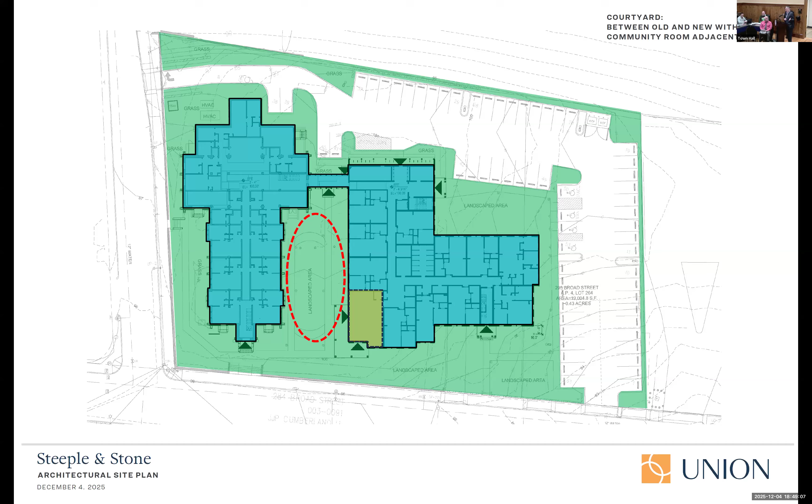And then the other thing was when we concentrated on the buildings, pushing those to the front, having a conversation with the church, we really tried to push the parking to the side and to the rear, so that, as Mr. Modica said, we don't have a lot of asphalt and paving visible to the passerby.

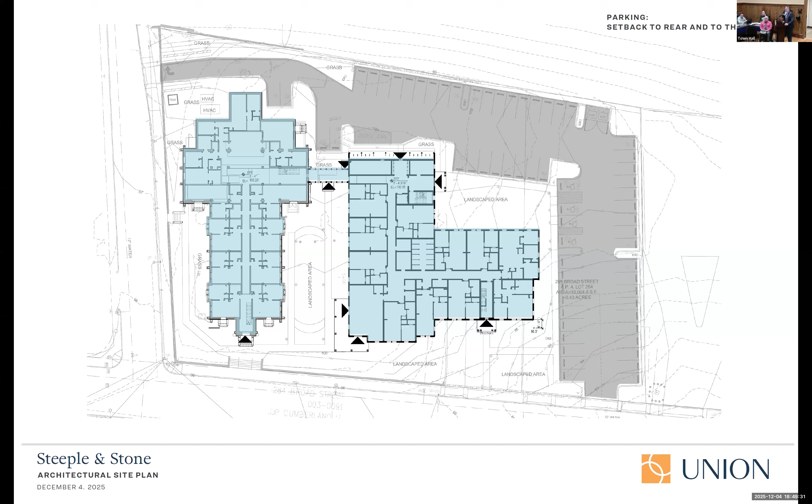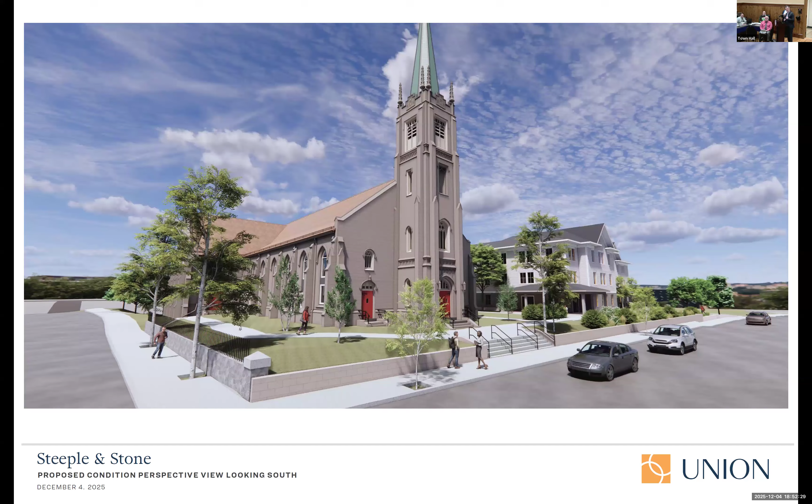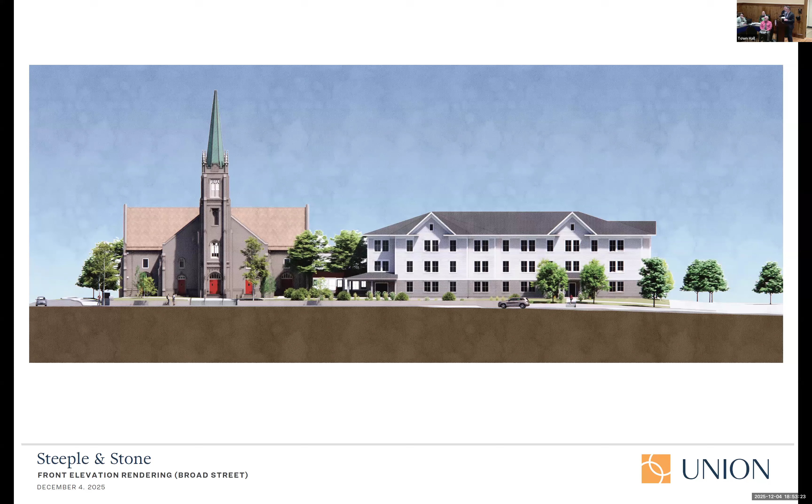I just had a quick question about the handicap parking - I was trying to figure out the placement, why the handicap parking isn't kind of around the corner closer to the main entrance. It looks like people would have to park and walk down that long sidewalk to get to the main entrance. Let me go back to that real quick.

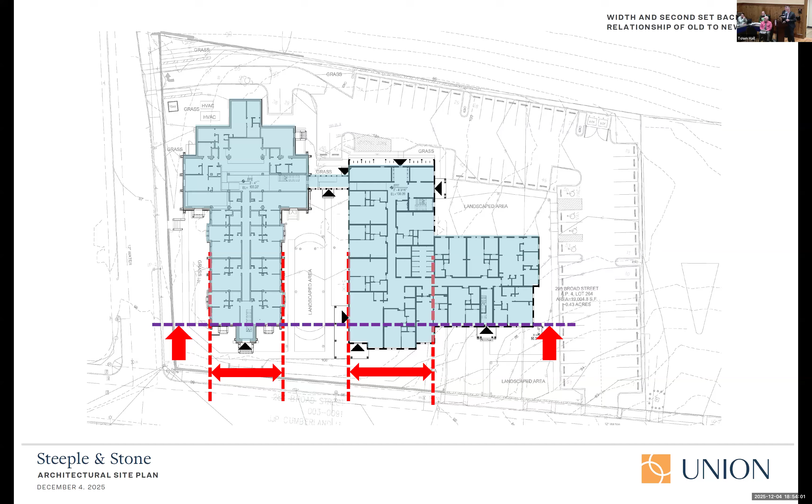Okay, I'll let the civil engineer take care of that one, is that okay? Okay, great. Anyone else? Mr. D'Ambrosio.

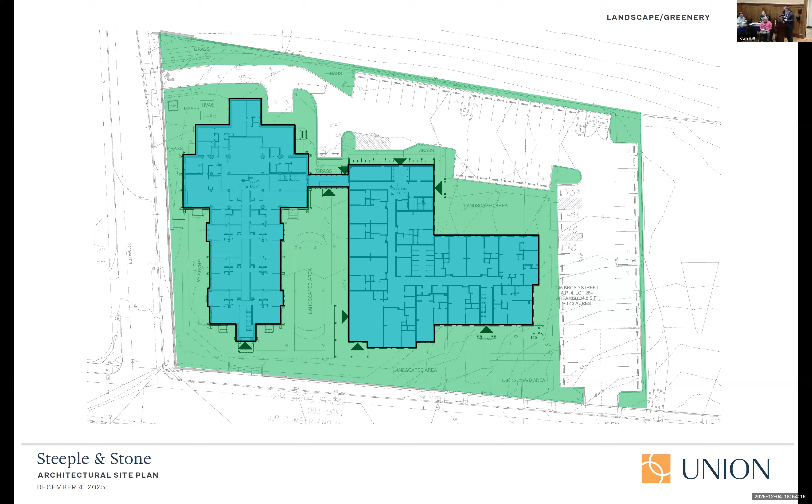I know it's early in the process, but I'm wondering if you could speak about what you're thinking regarding materials, and how the materials of the new building are going to relate to the church, since they're going to be physically and visually connected.

It's a very good question. I think what we're proposing is, we're very contextual in our office, very vernacular oriented. One of the things I'd say is we're proposing clapboard siding, typical vernacular. This is obviously stone, but this is a wood frame, so it would make sense for it to be more clapboard. I think one of the things we're starting to look at is maybe this particular material would be a darker material so you could differentiate between the lower level and the upper level. But for all intents and purposes, it's really architectural shingles for the roof and a clapboard type siding here.

Right now, one of the things I could say is maybe clapboard at the base, or maybe board and batten at the base. We're not exactly certain, but it would be very contextual, very New England, very vernacular. It wouldn't be anything that somebody would walk or drive by and say, what is that? It would be very contextual.

And is that in an effort—I know sometimes with historical buildings, historic preservation likes an adjacent building to be very different so it doesn't try to blend in. Is that kind of the idea here?

I would very much agree with that, in terms of it. I wouldn't say very different. I would just say that because of the way it's built and the typology of its wood frame, this would be typical to New England. If it's a church, obviously with its masonry, its heavy stone, that is very vernacular to a church. For this type of building, I would say clapboard or board and batten is very contextual, very appropriate for this type of project. Okay, thank you.

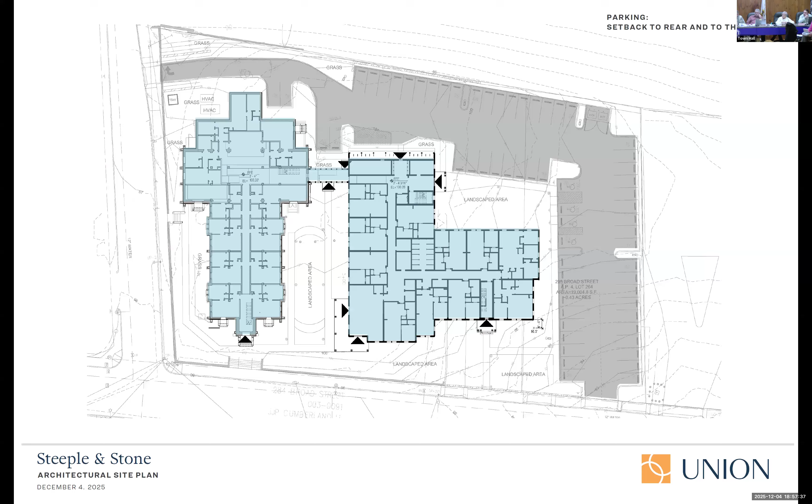Okay. The church, I already know it's that way, and you're showing us the side of the church that faces Church Street. That's what we're looking at. So it's already existing, beautiful. That building—

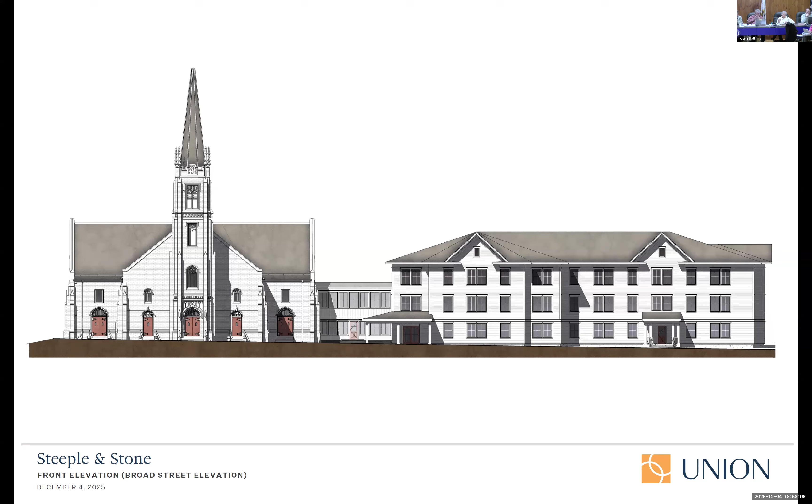is not something that I would like to see in that area. I know you put a lot of work into it, but it doesn't really fit in that neighborhood. It looks like a medical building to me. It looks like something that was put together very quickly because we got to do it and put it up because we want to go from 40 to 60, or 44 to 60. It's not appealing to me, and that's my opinion.

If you had shown me a picture of what it's really going to look like, maybe I would change my mind, but it's white. We had another project not long ago that looked exactly like that, and I said go back and change it because it looks like a medical building. It doesn't look good in there.

And being a nurse, that's what I'm looking at, a nursing home with little windows and two doors, with a little yard in the middle for the patients to come out in a wheelchair, and that's what I'm visualizing there. I'm sorry, I know my opinion. I don't like it for that neighborhood, and I'm part of the neighborhood.

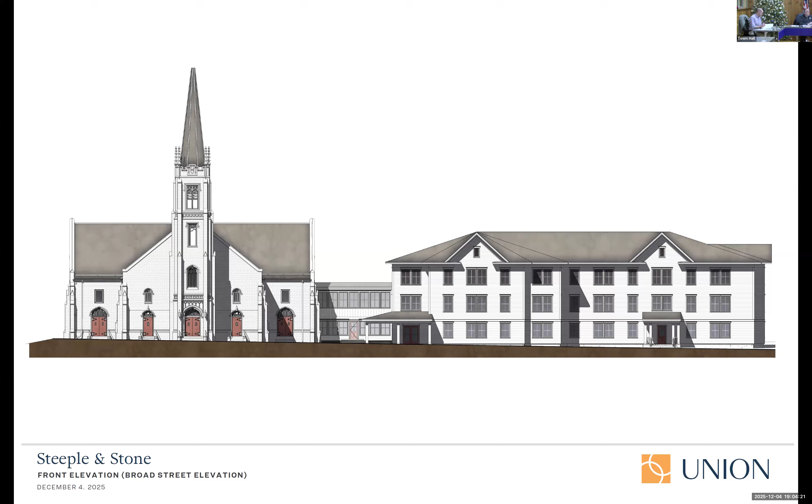Mr. Costa, go ahead. Okay, thanks. I'm just curious, how do you figure out where the elevator is going to be and how many are going to be?

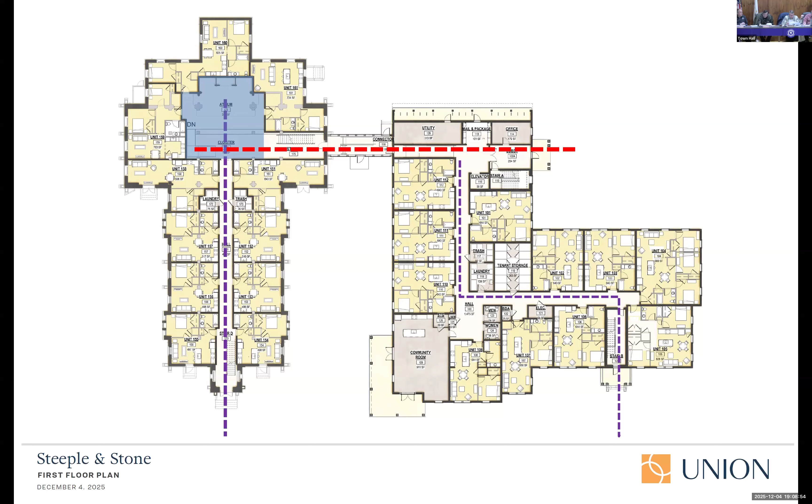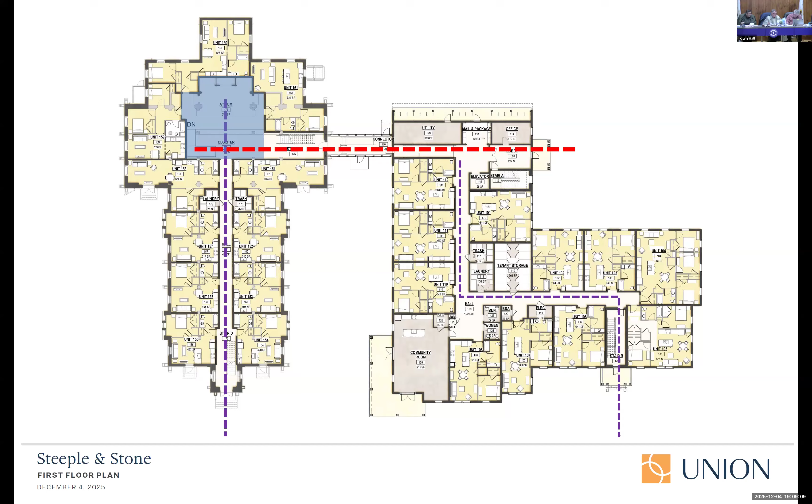When you set this portion back, it does look large in a 2D elevation, I'll grant you that. But when we step it back 10 to 12 feet, this width now has a relationship to the width of the church. By breaking it up through massing and step backs, it doesn't read as one wall.

There are ways to think about the base as maybe a different texture, maybe board and batten, which is one of the first vernacular sidings we did in the Americas. You could look at something like that and then differentiate. So not only do you break it up side-to-side, but vertically too, and that's where you get the gables and overhangs, with shadows and things like that to break it up.

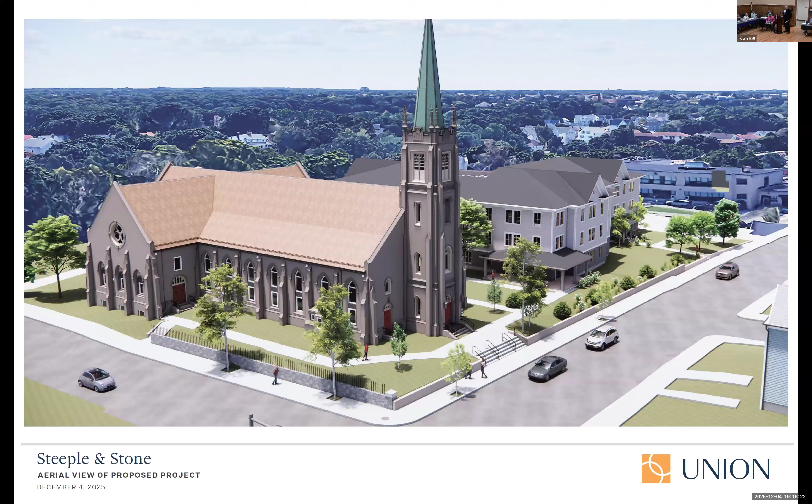With our revised plan, since we were last here on the 25th, we made the actual building a little bit smaller. The porch was realigned. As Joe mentioned, we redid the entrance area. We've reworked the sidewalks in the courtyard with some pervious pavers, as was asked for when we were here before. We put a sidewalk back in on this side of the church, and found a couple more parking spaces than we had before, now that the building got a little bit smaller.

So we have more lot coverage than existing conditions, but less lot coverage than we were previously approved for. Surprisingly, when I looked at the numbers the other day, we actually have less asphalt on the site. We have more coverage, but it's mostly in buildings and sidewalks.

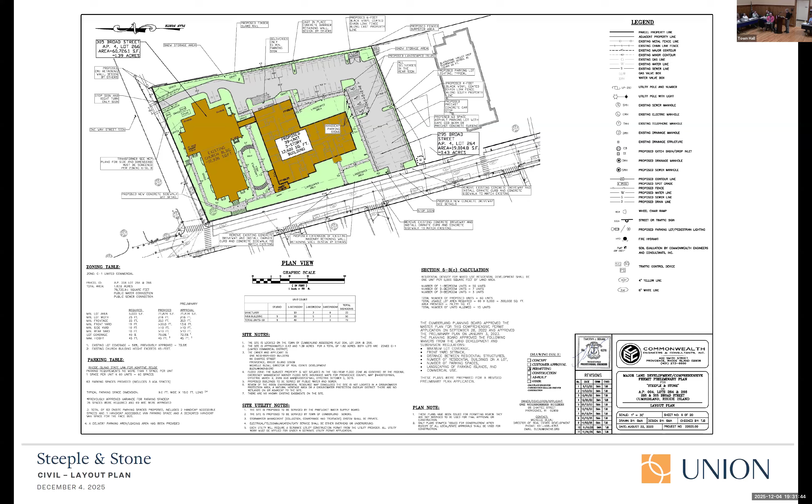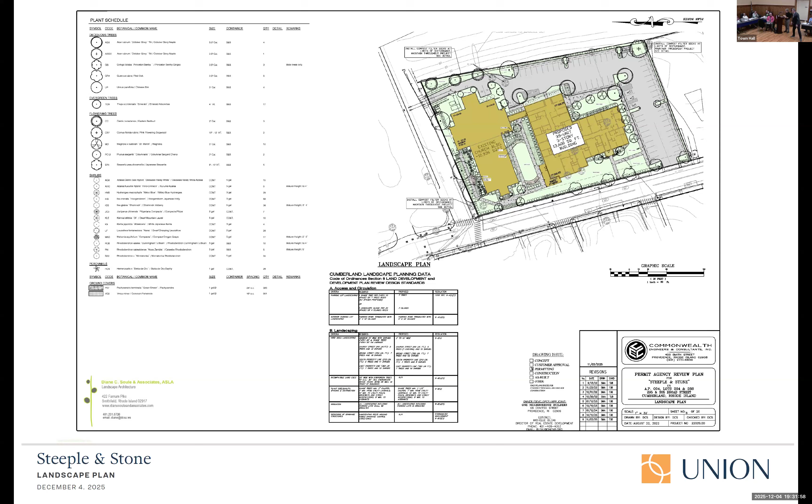All right, let's figure out how this works. This is a little larger than the one on the screen previously. So as I mentioned, we're meeting the code for the landscape requirements. I'll start along Broad Street here.

Here we have street trees and a uniform hedge of different plant materials behind the sidewalk and the front of the buildings, basically skirting along the backside of the wall with street trees, and then additional landscaping at this entrance. Then on down to the left, we've got the entrance to the church with additional trees there. And the courtyard mentioned earlier is this area here.

It's surrounded by walks that tie into the building, and then 2 seating areas, one up top and one down below on permeable or decorative pavers. That whole courtyard is skirted with plantings that buffer the hardscape of the buildings, or the facades of the buildings. Then coming along to the corner here, going up Church Street, we have existing mature trees, and we've supplemented that with additional vegetation, creating in this area a seating alcove surrounded by plantings that buffer and create, I'll call it, a secret garden for residents to enjoy.

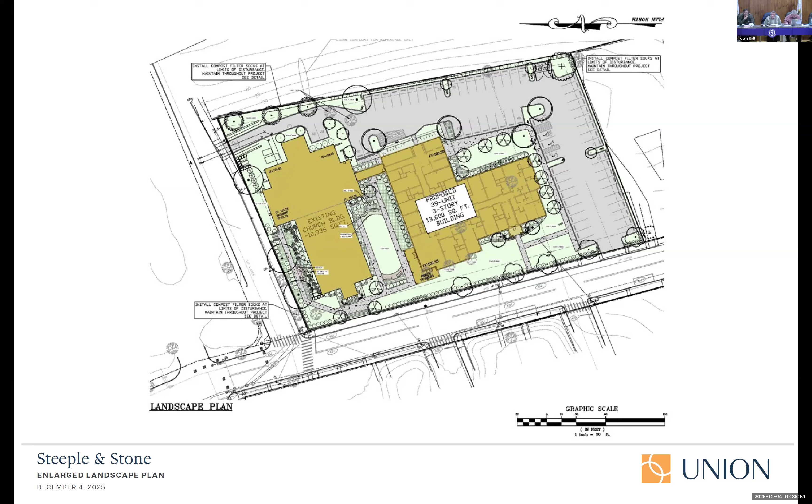Okay, then I'll close the public hearing at, let's see, 7:38 p.m. Restrict comments to the board. Anyone? Anyone? Nobody has any comments?

There's 2 motions. So the first motion regarding Steeple and Stone, 295 Broad Street, Assessors Plat 4, Lot 266, and 305 Broad Street, Assessors Plat 4, Lot 264.

I'll make a motion that we approve the preliminary plan application, based on the findings of fact in the Planning Department's memo to the Planning Board dated November 26, 2025, certified that it is consistent with the comprehensive plan. This approval does come with adjustments from residential density, maximum lot coverage, number of buildings on a lot, and from the requirement that a commercial use be incorporated into the development.

End of motion. I have a motion by Mr. Butler, with the following conditions: merge lots 266 and 264 through an administrative subdivision and obtain a Rhode Island Department of Transportation physical alteration permit. End of motion.